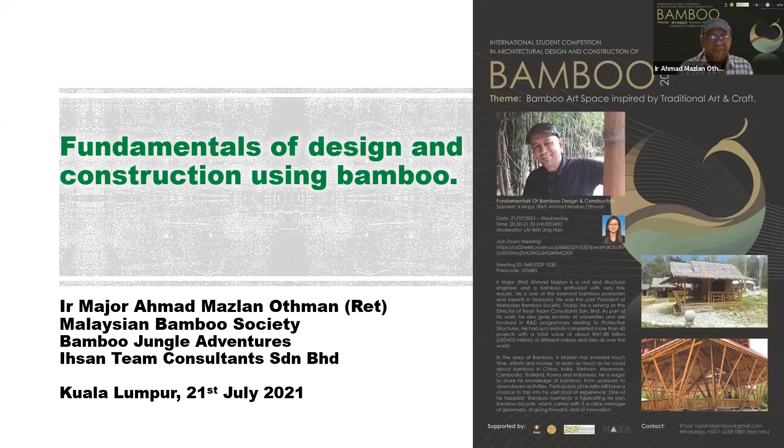I'll talk a bit about the design basics of bamboo building or structure. The scope of my talk is a little introduction to bamboo - what, why, and how. I don't have diagrams of the anatomy, but I will explain it a bit later.

And some fundamentals about designing using bamboo - selection of species, and durability, which is a very important element in doing bamboo construction. Also some basic design requirements and bamboo working basics. I will use the jobs that I've done in Malaysia to review the things I'm talking about this evening, and then we'll open for Q&A after that.

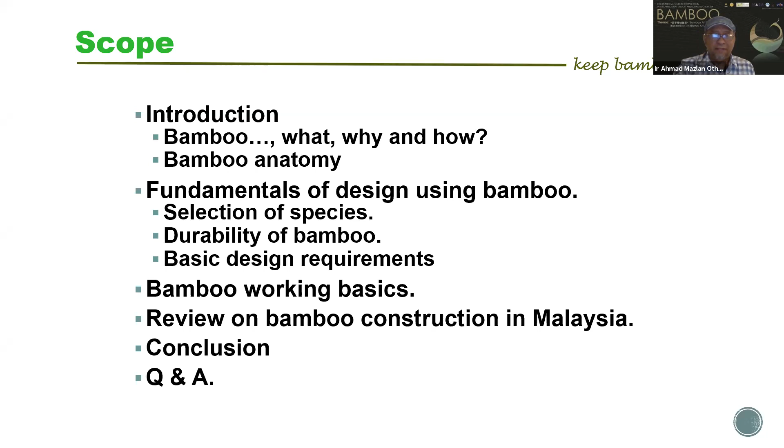Bamboo is a gift of God. It's a miracle plant, a giant grass - it's not a tree, it's grass. And it's a planet savior, we used to say that, because it gives more oxygen and also sequesters carbon dioxide. And it's a plant with 1001 uses, very useful. Bamboo is stronger than steel, and bamboo is the fastest growing plant on earth.

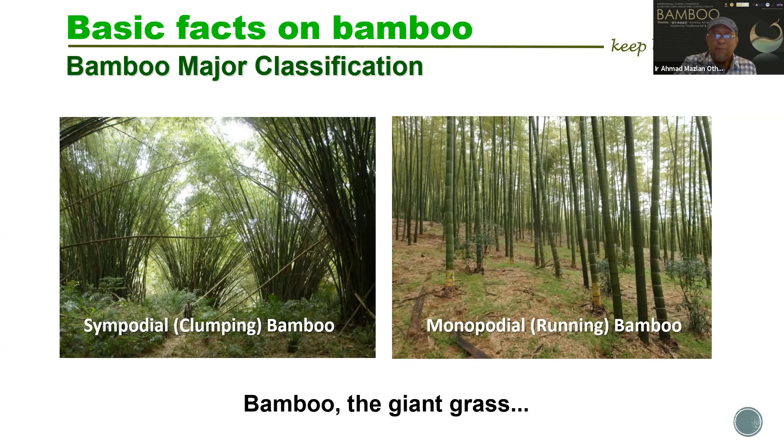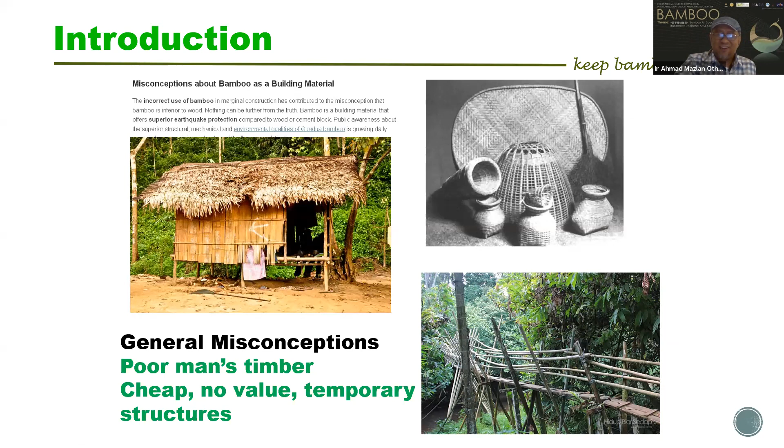Around the world we have got more than 1,500 species. More now, people are discovering more new species, hybrids and all that, so now basically probably about 1,600 or 1,700 species of bamboo worldwide. And unlike softwood, bamboo can be harvested - mature bamboo is between 3 to 5 years, or 3 to 7 years for some species. So bamboo is a hardy crop, a very strong crop. You just, for example, take the branch and poke it into proper soil, then it will grow. So it's very easy to grow bamboo.

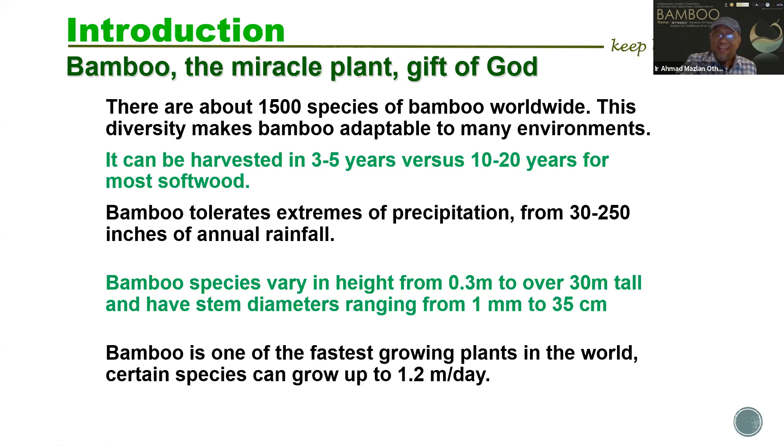We have small bamboo that's only 0.3 meters in height, and others over 30 meters, ranging from 1mm to 35cm in diameter. The species that was standing just now, Dendrocalamus giganteus, can go up to like 35 centimeters. Bamboo is one of the fastest growing plants in the world - there's a record saying bamboo can grow 1.2 meters a day. If you sit in front of a growing bamboo, you can see it grow 1.2 meters a day, you can see it growing basically. So it's the fastest growing plant in the world.

I would like to also mention about this miracle plant - there is a Chinese saying, I don't know how to say it in Chinese, but the English translation is: a man is born in a bamboo cradle and goes away in a bamboo coffin. Everything is possible with bamboo. Meaning that from your birth until you are dead, leaving this world, anything is possible to do with bamboo. And there is a common saying that don't ask what you can do with bamboo, but ask what you cannot do with bamboo - that means anything is possible with bamboo.

Like Miss Beh was mentioning, my passion is making my own bicycle. So the bicycle, we do a bamboo frame for a bike.

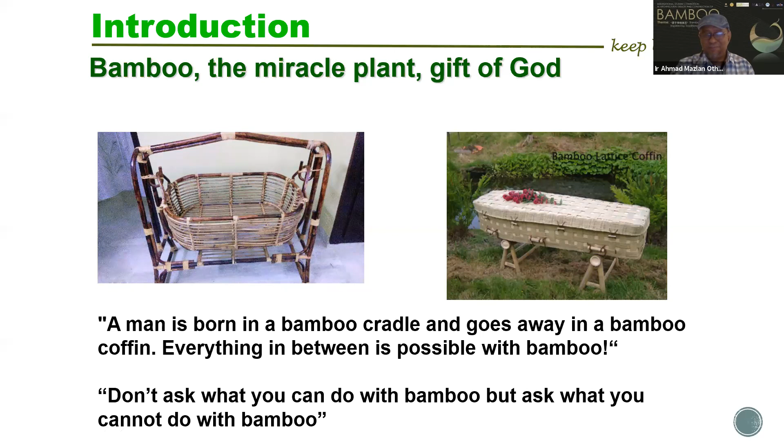People say that bamboo is stronger than steel. Yeah, it's true, but by weight - more strength to weight ratio. I mean, by the same weight, bamboo is stronger than steel.

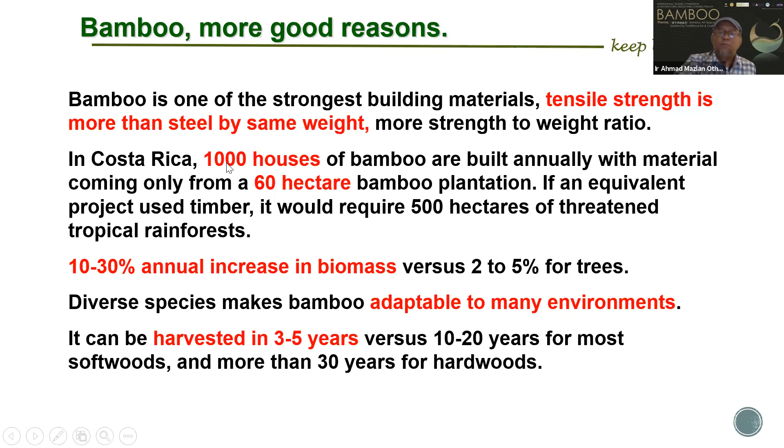In Costa Rica, 1,000 houses of bamboo are built every year from only a 60-hectare bamboo plantation. That means from 60 hectares of bamboo plantation, they are building 1,000 houses a year.

How can bamboo's true potential as a building material be realized? Like I mentioned earlier, the main problem with bamboo is durability. In order to build a building, you need it to last very long. As engineers, normally we design our building with a design life of 50 years. So can bamboo last that long? That's the issue - durability.

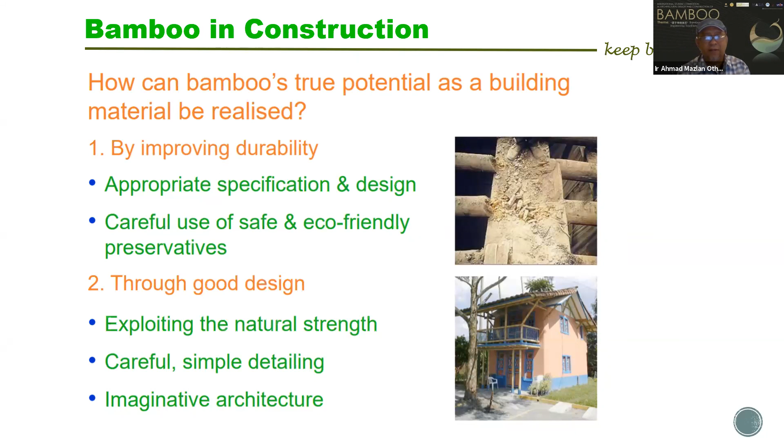You need to improve durability by having appropriate specification and design, and by doing treatment to the bamboo. Number two is good design - it's very important. That means you exploit the natural strength of bamboo, you have good detailing, and good imaginative architecture. You can combine bamboo with other materials - steel, concrete, or wood. So you can exploit the natural strength of bamboo through good design.

Okay, so the basics of designing bamboo. When you want to design and construct bamboo structures or buildings, these are the basics you need to fulfill. You must select the right bamboo species. Although we say there are about 1,600 species in the world, not all species can be used for construction. Some species are good as food - the bamboo shoot as food. Some species are for other uses like landscaping or for making bamboo fabric. So you have to choose the right bamboo species for construction.

Then again, to improve durability - if you don't treat the bamboo building or structure, and just harvest the bamboo and build your structure, it can only last probably 1 or 2 years at most. It will rot because it's organic material. It will be attacked by fungus, and by insects like the powder post beetle. So you need to treat the bamboo in order to enhance its usable life, the durability.

Then again, you need a big hat and big boots for protection against rain and shine. This is the foremost thing you have to look into in bamboo design - the big hat and big boots for protection against rain and shine. That means protection against ultraviolet rays and also protection against dampness and water. Because bamboo is a hollow material with a circular shape, the stability, rigidity, and fixity of the joints is very important. So to overcome that, triangulation for stability is very, very important when you do a bamboo structure. So number one, you must use the right species, and you must do bamboo treatment and preservation so it can last long for the intended life.

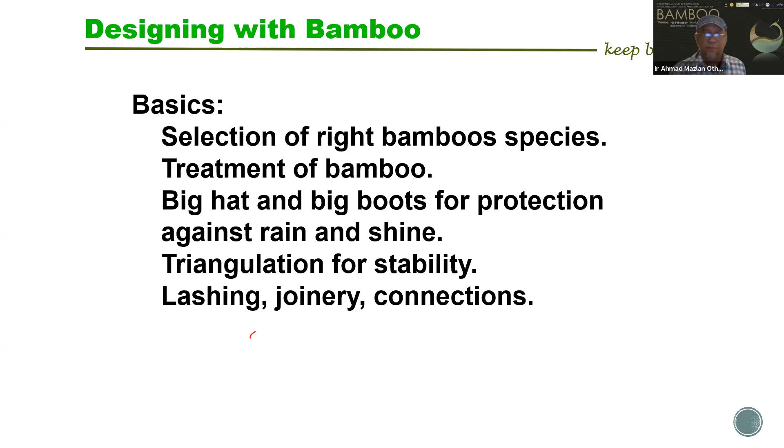Also, you need to understand the bamboo. Another feature of bamboo is it dances in earthquakes, because it's flexible, easy to bend, and lightweight.

That's why in Costa Rica, only bamboo houses stood after a massive earthquake in 1992, because the bamboo dances in the earthquake. Also, the maturity of bamboo for construction is between 3 to 7 years.

But like I mentioned earlier, it's a very useful plant. Even the shoot, you can eat it, if it's less than 30 days old. And if the pole is 6 to 9 months, you can turn it into a basket.

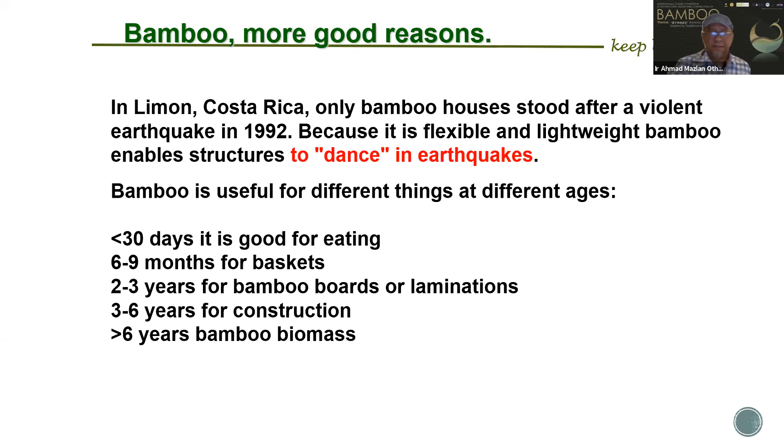For making bamboo board lamination, the age is 2 to 3 years. For construction and furniture, 3 to 6 or 7 years. After 7 years, you can turn it into charcoal or biomass, still useful. That means bamboo is useful at any age.

Selection of a matured pole is very important, because that's where the bamboo already has the optimum strength. This is very important in doing bamboo construction.

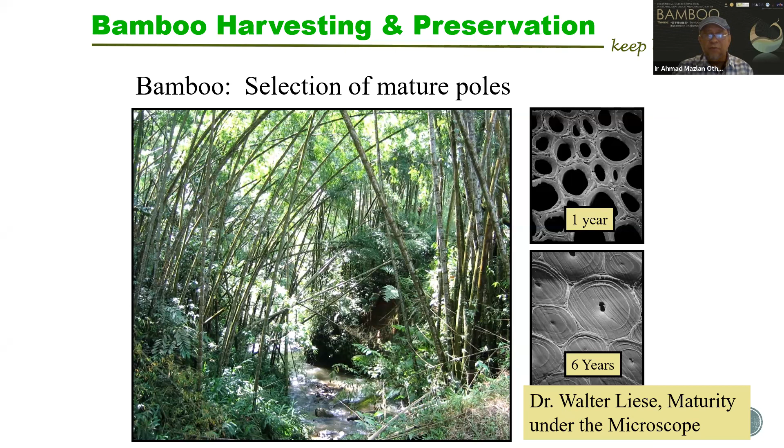Okay, this is earlier one. And how do you select matured bamboo? You can see from the texture, the skin of the bamboo - we have young bamboo, matured bamboo, and old bamboo.

The texture or skin, the lichens, and the white spots - more white spots, more lichens, is the sign of matured bamboo. When we go for bamboo exploration and harvesting, we observe this and mark it according to the age, so that we harvest the correct age bamboo.

Sometimes we select by knocking the bamboo, because different age bamboo has a different kind of sound - the tone is different. A denser tone for older bamboo, a very hollow tone for young bamboo. That's how we select the bamboo.

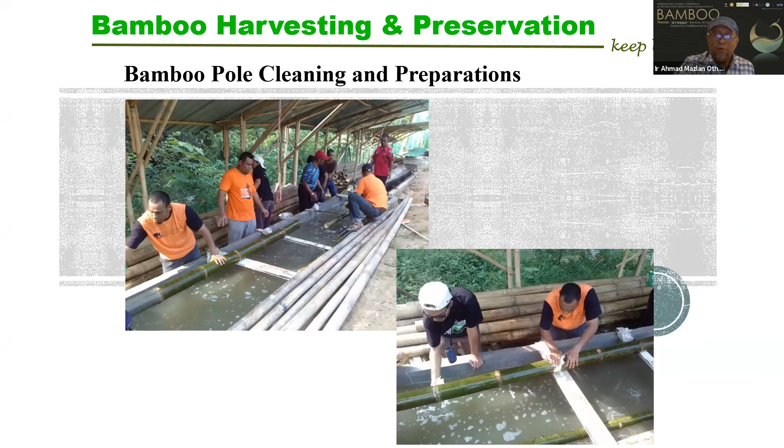After selecting, we harvest the bamboo - we cut it. There are some techniques we have to follow, the proper ways of harvesting bamboo. Then we clean the bamboo. And the importance of bamboo preservation...

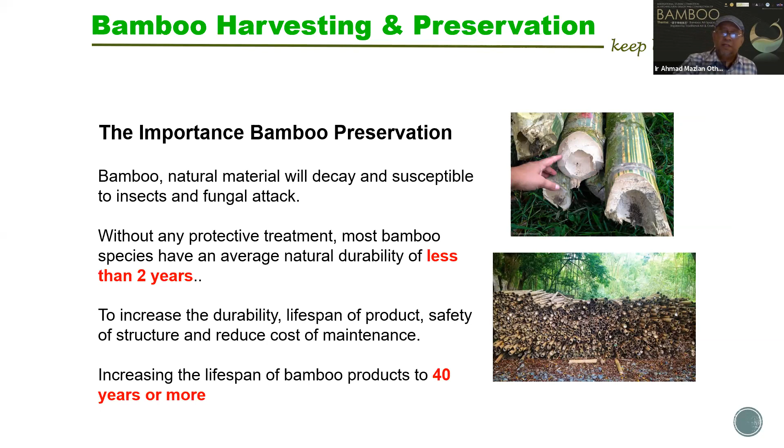If you don't treat or preserve the bamboo, it can only last less than 2 years. But with proper treatment, it can last more than 40 years. Properly designed, properly treated, with the right species and the right age of bamboo, you can easily have more than 40 years lifespan for the structure or building you build.

This is bamboo preservation - either using chemical or non-chemical means. We have different methods. Do you want to know more? This is going to be a different lecture.

Either using the modified Boucherie method, the dip diffusion method, internodal injection, or hot or cold treatment. The modified Boucherie method and dip diffusion are quite common. Dip diffusion means you soak the bamboo in the proper preservative chemical for 2 weeks.

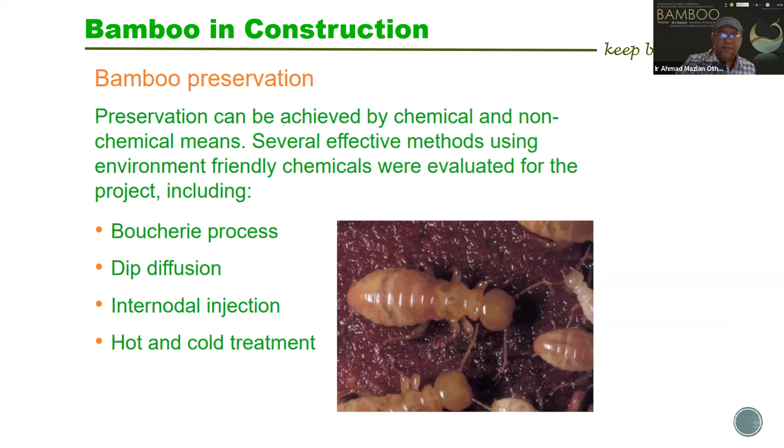And the Boucherie, you pressure inject into the bamboo cell. So these are different methods. This is the Boucherie, and the common preservation chemical that we use is boron in this country.

Hot dipping is boiling that. And basically I'm using this chemical, borax and boric acid. We combine borax and boric acid in the right proportion, then it becomes boron.

This kind of treatment using boron is just for internal use, because it's a non-fixed preservative. Non-fixed preservative means if you use boron to treat your bamboo and expose it to the weather outside without shelter, the preservative will leach out. That's why we call it non-fixed. So for whatever structural element or building component that is sheltered, you can use boron.

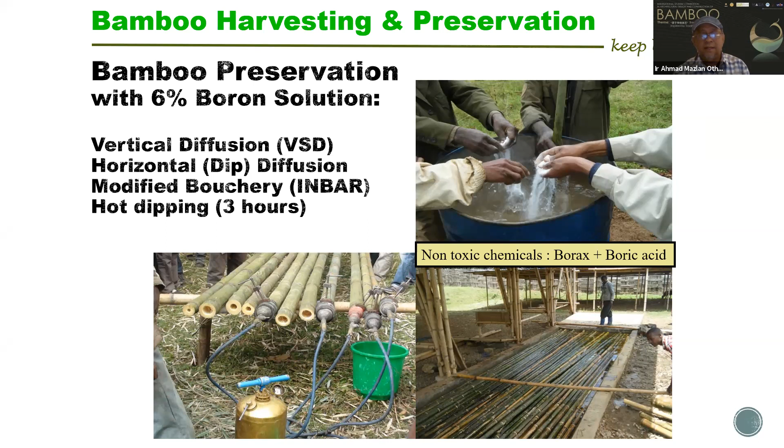But if you want a structure exposed to weather, rain and shine, especially rain, then you cannot use boron. You have to use copper chrome boron, CCB, which is a more expensive chemical. Earlier they used copper chrome arsenic, but now it seems banned in the market because of the toxic level. So now for external use we use CCB, copper chrome boron, and for inside or sheltered components we can use boron.

So that is the preservative. This is boron, which is non-toxic. In fact, most of these kinds of chemicals are used as food preservatives, using borax to preserve food.

Basic bamboo working. In fact, the miracle of bamboo is that it's the only material you can DIY from the very beginning. That means you can plant the bamboo yourself in your yard, harvest it, treat it, and do whatever after that for construction, furniture making, or handicraft — completely by yourself if you wanted to.

Unlike other materials like cement, you cannot produce your own cement. Steel, you cannot produce your own steel. Even timber — you cannot go into the jungle and cut a big timber log yourself, it's not possible. But bamboo is a miracle plant; you can do it all by yourself.

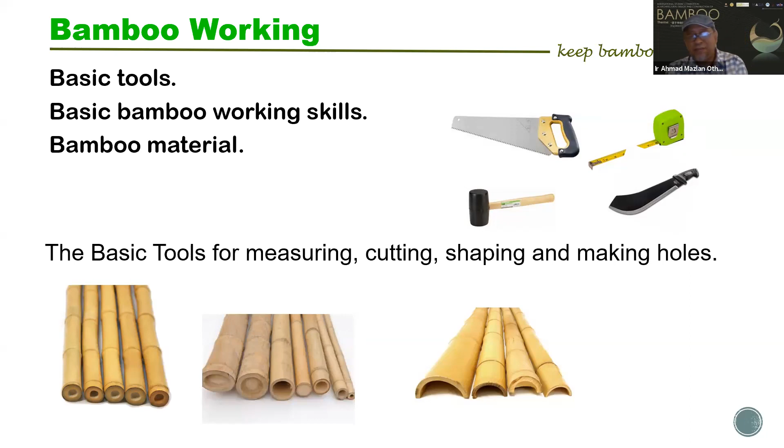For your own needs you just need simple basic tools like a saw, a knife, measuring tape, a hammer. That's all the basic tools, and you can do many things with that. Even houses you can build with these simple tools. So that is bamboo working.

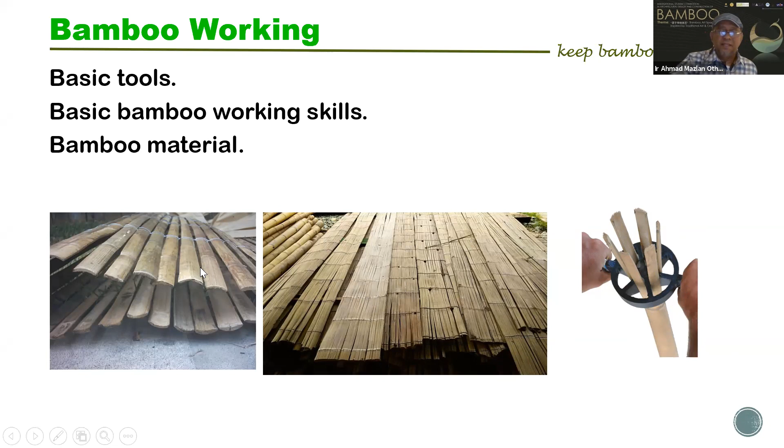Earlier was bamboo poles, half. In Malaysia now there's a very strong effort by the government to promote bamboo, to turn bamboo into a game changer for the commodity. The government is giving strong effort to promote bamboo, and the industry is growing in Malaysia.

We also have people selling bamboo shoots, making furniture, and people are beginning to do bamboo plantations now. In fact, the government, through the agency Malaysian Timber Industry Board, is giving out soft loans for individuals or corporations to establish bamboo plantations.

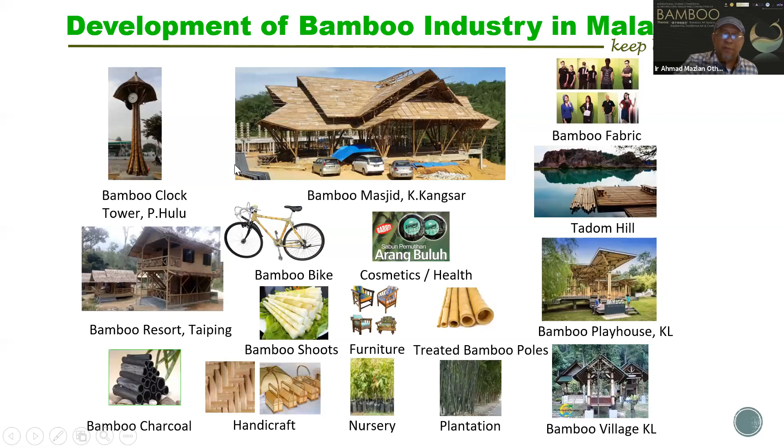We are also having many bamboo nurseries now in the country, and we are making handicraft and bamboo charcoal here. So this growing industry is growing in Malaysia now, and I foresee that construction is still can be the main or the prime industry in bamboo in Malaysia.

Why bamboo for construction? Bamboo is the closest alternative to timber. The way of working with bamboo is almost the same as timber. Only timber is solid, bamboo is hollow, but it's the closest alternative to timber, sustainable and renewable, fast growing, harvest in 3 years, and without replanting. And like I mentioned earlier, it has a high strength to weight ratio.

Bamboo is stronger than steel. It's true, proven by lab tensile test. We did a tensile test between bamboo and steel, and bamboo proved to be stronger than steel.

It's easy to work with using basic tools, light and easy to bend. And also, like I mentioned earlier, it can absorb force and vibration, dancing in the earthquake. It's easy to maintain or repair - whatever damaged parts, you can just replace. And it can last very long, with proper treatment, more than 40 years.

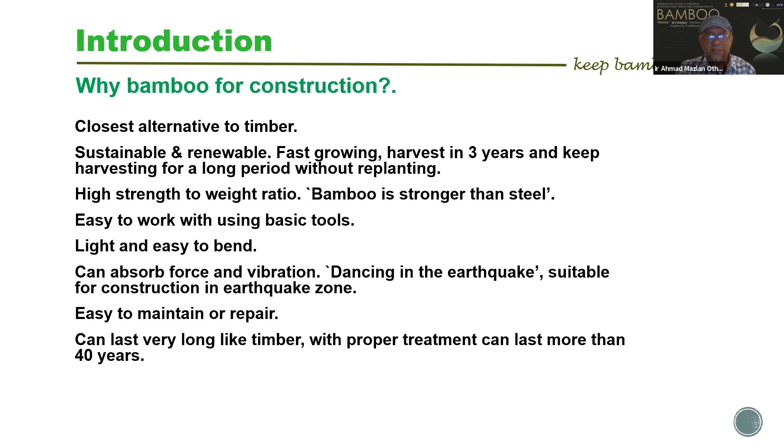A little bit on bamboo in Malaysia: we have got 70 species in our country. We don't have much plantation, but we have a very big area, 5 million hectares of bamboo natural stand in Semenanjung alone, bamboo clumps, bamboo jungle, natural stand. And we don't have a major bamboo industry yet in the country.

But one thing is that we are blessed, Malaysia having a good climate and soil that is suitable for bamboo cultivation, and many foreign good species are growing well here in our country. So there is strong effort by the government now to promote bamboo plantation and the growth of related industry. Welcome all to join to plant bamboo and also to do some related industry with bamboo. The government is giving a lot of incentive and subsidy on bamboo plantation and bamboo industry. You can check with Malaysian Timber Industry Board for that.

Another thing I want to let you know, selection of species is very important for construction. Like I mentioned earlier, not all species are suitable for construction. But we are lucky here - this is the top 20 best bamboo species in the world.

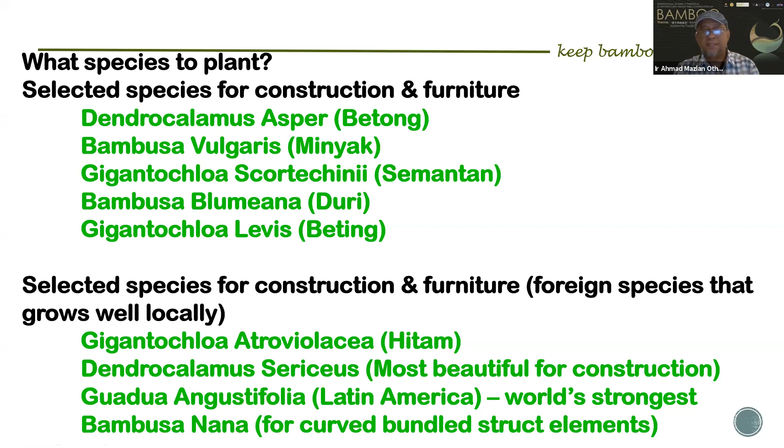That is bulu hitam or Gigantochloa atroviolacea, Dendrocalamus sericeus, Guadua, just now I mentioned, the world's strongest bamboo, also growing well here, and Bambusa nana also growing well. So basically, we have good soil and weather to cultivate these good foreign species for construction. So these are the species that if you want to plant for construction or for furniture, these are the good species that you should be planting.

An important thing about bamboo in construction is that before you design your bamboo structure, you need to source where you're going to get the bamboo. When I started doing bamboo construction in 2013, I imported treated bamboo poles from Indonesia. But those were the days.

After 2 or 3 years, I switched to harvesting bamboo from the jungle here in Malaysia and doing the preservation and construction ourselves. Source of bamboo is important because you must have enough supply, and the cost of bringing bamboo to your place should not be expensive. When I imported from Indonesia, the freight and transportation cost was more than the cost of the bamboo itself.

So the source of bamboo is important to consider, whether the species you want is available. You also need to design to suit the strength - the real strength of bamboo is tensile strength. And you have to take into account the weakness of bamboo, because it's hollow with fiber running in just one direction, so it's easy to crack.

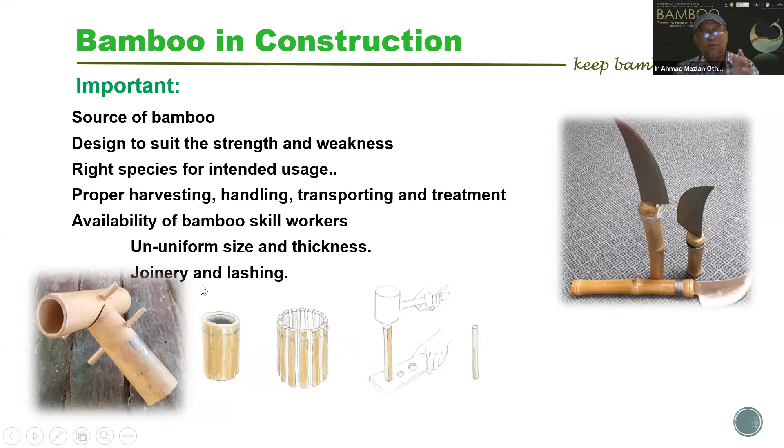Many local bamboo species are suitable for construction, whether structural or non-structural. My practice is that for structural use, I take bamboo with thickness more than 6mm. The thickness of bamboo varies from bottom to top, because it tapers towards the end, and the thickness also gets thinner towards the end. So for structural purposes we need more than 6mm thickness.

These are the species I normally use in my projects: Betong, Minyak, Duri, Semantan, Beting, Matarusa, and Brang - these are the species for structural use. For non-structural use, it can be any species - meaning for wall, floor, roof, cladding, mats, etc.

We even use woven mats - we use Buluh Lemang, taking the skin and weaving it into a mat. So Buluh Lemang can also be used as construction material for wall and floor. So for non-structural use, species doesn't really matter, but for structural use you need to consider specific requirements.

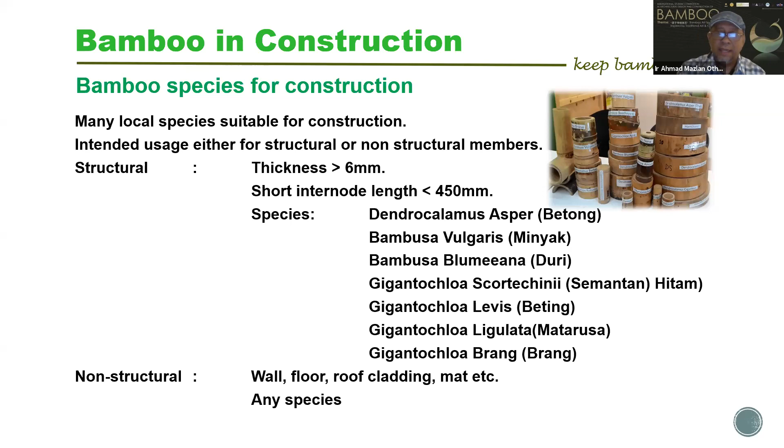You need a short internode length between the nodes, and it should not be more than 450mm - that's the general guide. The shorter the internode length, the stronger the bamboo; the longer the internode length, the weaker it is. That's why the world's strongest bamboo, Guadua angustifolia, has a very short internode length, less than 300mm, and is very thick. That's why it's the world's strongest bamboo.

Ways to use bamboo - later I will show you photos. Now for the literature part: you can use bamboo as a structure element, column, beam, joists, frame, trusses, and stairs, as well as building components like wall, floor, door, window, and for temporary structures like scaffolding.

I was made to understand this aspect with Dr. Low, who is specialized in using bamboo to strengthen soft ground.

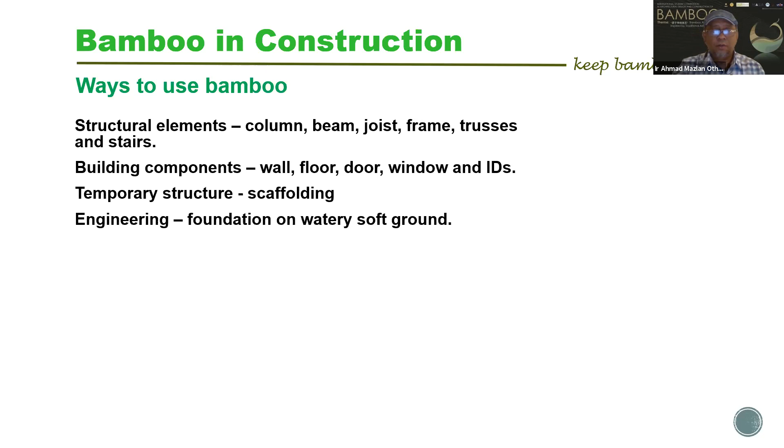When we design with bamboo, it's very important to avoid common mistakes. Two common mistakes I've noticed are exposure to ultraviolet light - which means you need a longer overhang - and exposure to rain and dampness, either from the ground or from rain directly.

So bamboo buildings end up rotting and giving a very bad impression, leading to the misconception about bamboo. We need to have a big hat and big boots to protect against rain and shine, and we need to understand the material and use it to its fullest capability. Normally we say there's nothing wrong with bamboo itself - only our construction techniques and design are not good.

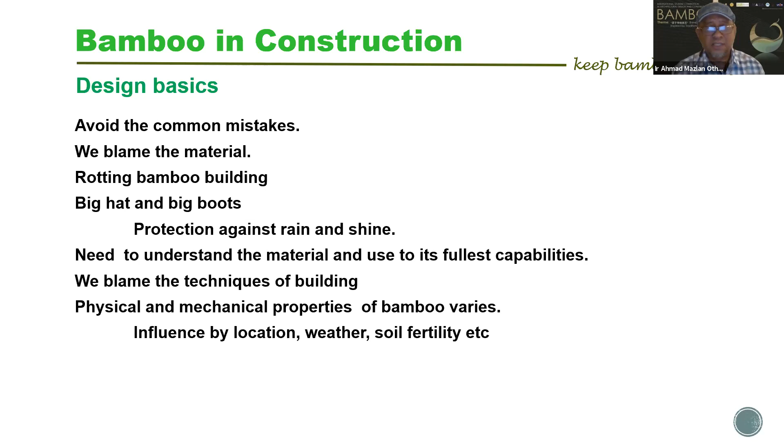I mentioned earlier that the physical and mechanical properties of bamboo vary, influenced by location, weather, soil fertility, etc. Now for design basics.

This is very important. If you want to build a bamboo structure that can last very long, you need to have a big hat and big boots. A big hat means protection against rain and shine, while big boots means protection against water and dampness from the ground.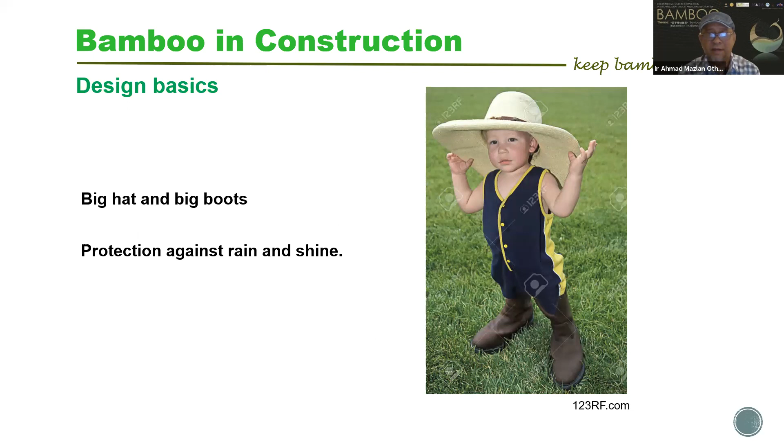For example, this is the overhang for a bamboo structure - you need a longer overhang compared to normal buildings. Normally we have about 2.5 feet or 750mm as the standard overhang, but for bamboo you need to extend it more so that when it rains, the rainwater doesn't touch the bamboo. That's why you need a big hat here.

You also don't want water from the ground to seep up, which will rot your bamboo - that's why you need big boots. Typical bamboo construction has a stump like this, minimum 10 inches or 25 centimeters. The starting point of the bamboo should be more than 250mm above the ground or floor, to protect against splash and seepage of water from below, from the concrete and so on.

That's why I say big hat and big boots. Sometimes in Indonesia they like to use natural stone blocks as the big boots to protect the structure. Later, Widi Nugroho will show more on using these stone blocks to protect bamboo from dampness below.

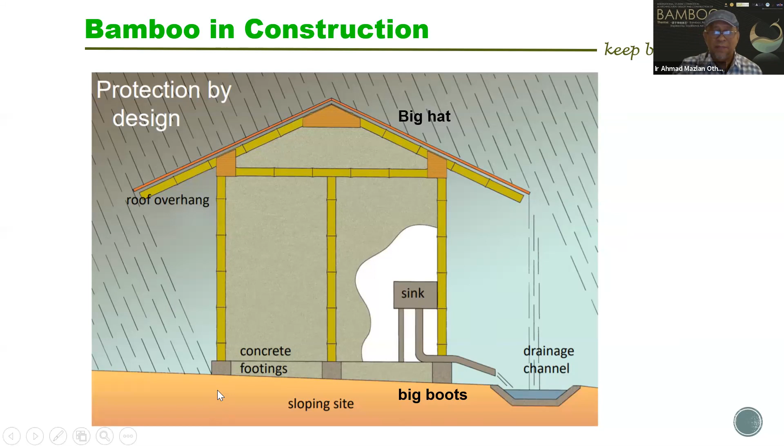Now, ways to use bamboo, either naturally or engineered. We have round bamboo poles - you can use big size bamboo for columns, or small size bundled bamboo for columns and beams. You can also have bamboo halves, bamboo splits, and flattened bamboo for walls and floors, which can also be laminated in 3 layers to make a strong beam.

This is engineered bamboo, laminated bamboo, processed bamboo, either as planks or lumber.

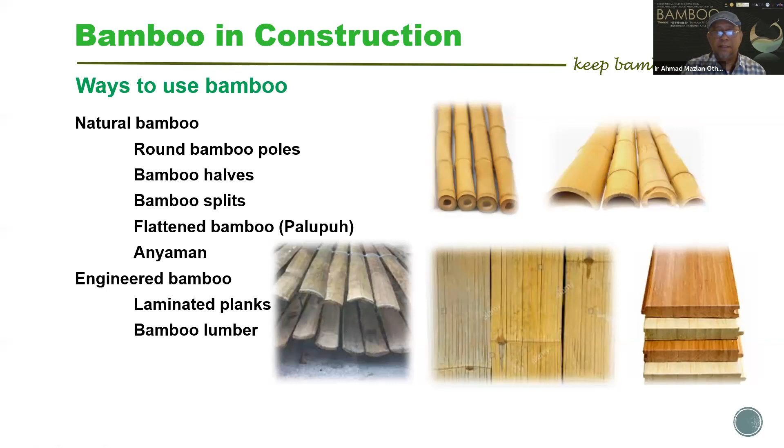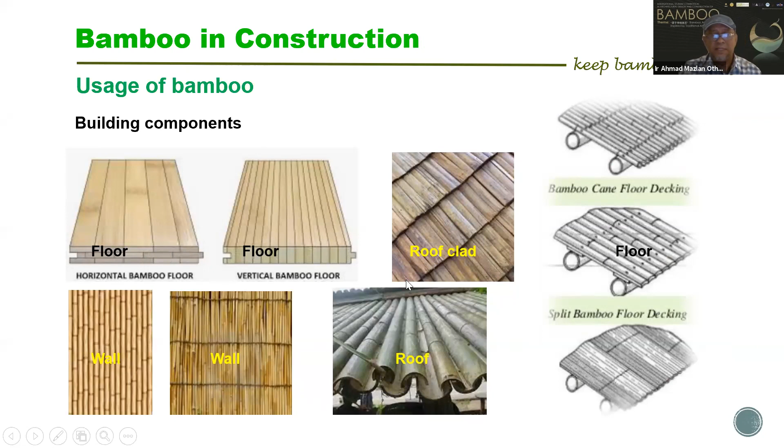And also flooring - that's how bamboo is used as a building component. These are engineered bamboo products, including very high density outdoor engineered bamboo, and this is bamboo lumber, bamboo plank.

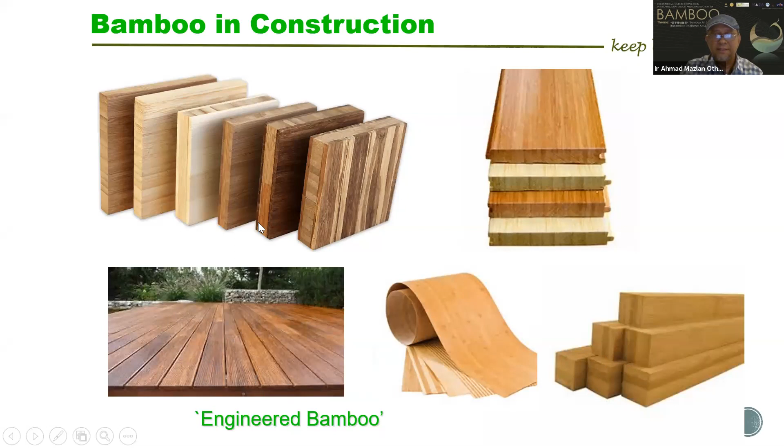Okay, this I want to see here. People used to ask me, some people are interested in having bamboo, starting with a small bamboo shed like a gazebo, and going up to bigger buildings and all that. So they approach us and ask us to quote for the bamboo building that they wanted to build. But eventually they shy away because they thought that bamboo is cheap.

So my own personal experience is that it's not really cheap. Although you can get the bamboo free, there's the cost of treatment and the cost of labor. I can say that just a simple bamboo building might cost you like 100 ringgit per square foot or so for a proper bamboo house. So it's about the same as using a cement house, a brick house, about 100 ringgit per square foot like that.

And now even timber is more expensive. We built a house with a footprint of 6 meters by 5 meters at our place in Taiping Resort. So 300 poles is sufficient for a 2-story, 6 meter by 5 meter bamboo house.

Unlike normal construction, bamboo construction labor is higher. The cost of labor is sometimes 60 to 65%. And the cost of material is lower, but the labor cost is high because, as I said earlier, skilled workers are difficult to get.

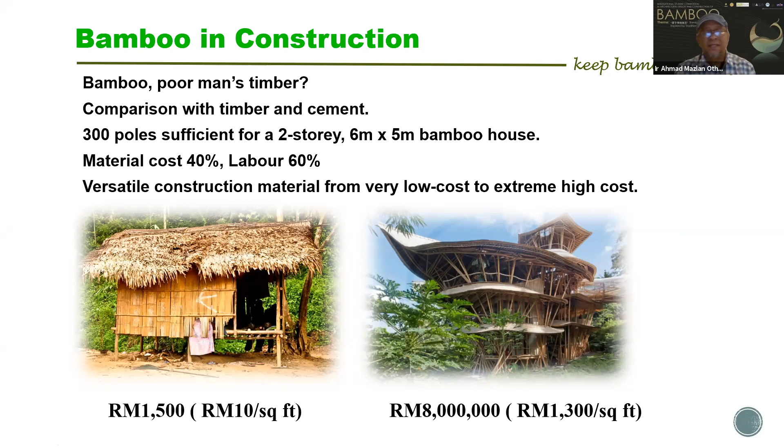Okay, just a little bit on the current status in Malaysia, because I don't think other speakers are talking about this. The general public perception is still that bamboo is cheap and cannot last long. We don't have a standard in planting, harvesting, processing, or sales of bamboo poles. We have insufficient supply of raw poles, we don't have plantations, and harvesting from natural stands is expensive, high cost, and we don't have many designers.

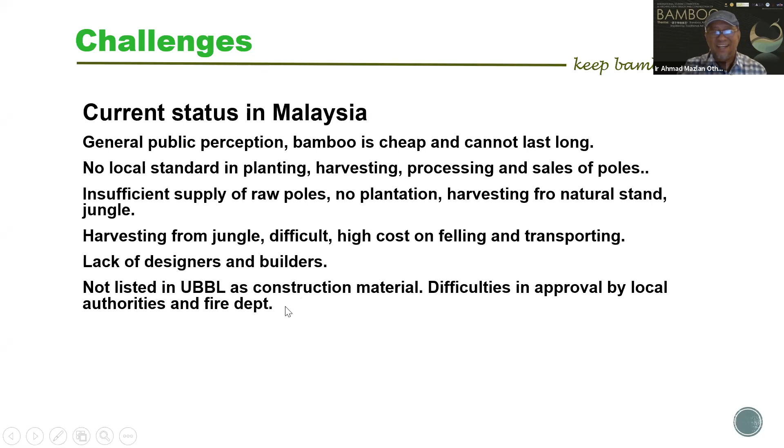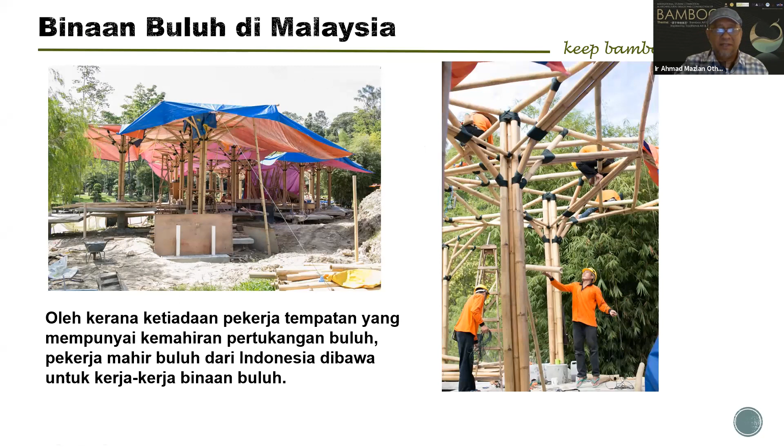We hope that future architects and engineers will give us more designers and builders. We also have problems with authorities for submission because bamboo is not listed as a construction material in the UBBL. So we're still facing that. In fact, I'm still going many times to the fire department to justify and get approval. Sorry that this text is in Malay, but this is from last time - maybe Dr. Elina already covered this one, the bamboo playhouse. We are still depending on foreign labor for skilled bamboo workers.

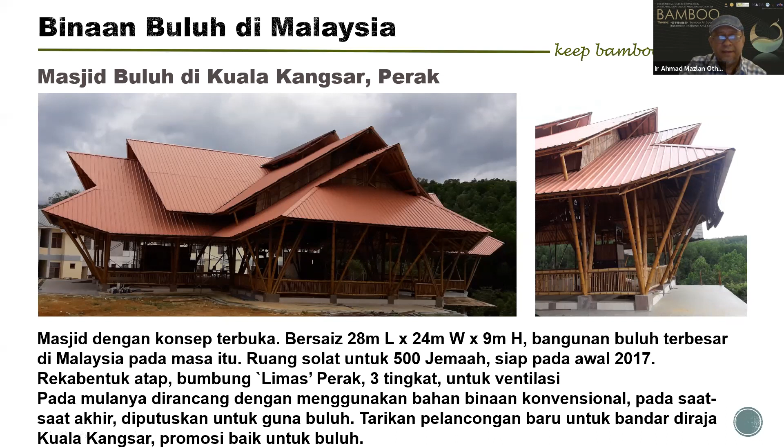This is a collaboration between me and WNA Studio in Bali, completed in 2017. While working with bamboo, models are very important.

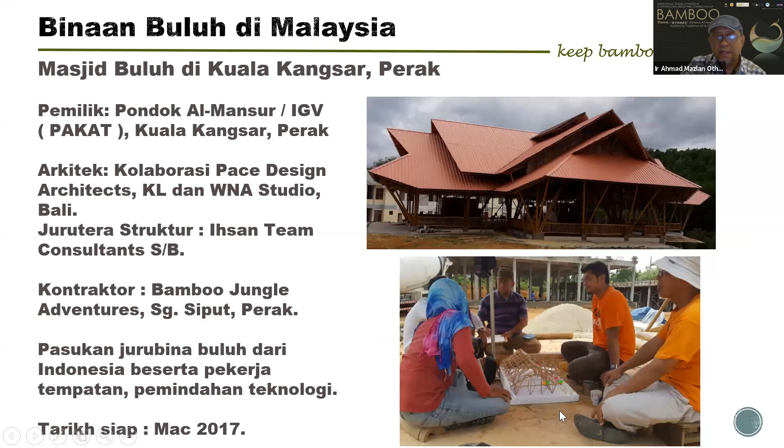Before you build out your physical structure, you need a physical model. This model is very important for the construction. Even though the size is scaled, the bamboo stick here is also scaled according to the size. The moment we build the model, we can press it and check which area needs attention.

So for all my other jobs, I do a model first, and from the model, I improve. We take this model to site, and the builders will follow every stick here. Let's say the scale is 1 in 100, so they measure the stick and multiply by 100. It's easy for them. Every element on the structure will be reflected on the model.

And this is the frame. From this model, we fabricate the frame, and our joints are pin jointed. Because of pin jointed joinery, which isn't very rigid, we have to have triangulation, a lot of triangles to stabilize the structure. So we use threaded rod and nut as connectors, modern metal connectors.

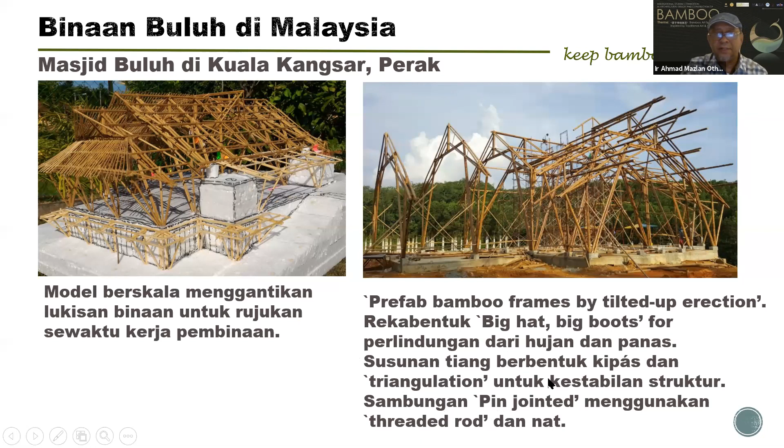While doing this job last time, I imported the bamboo, but now I'm using local bamboo because shipping costs are very high now. A 40-footer container from Jogja or Bali can easily cost more than 20,000 ringgit, just the freight cost. So now I'm using locally available bamboo and we treat it ourselves. For the structure in Kuala Kangsar, we used 80% imported bamboo and 20% local bamboo.

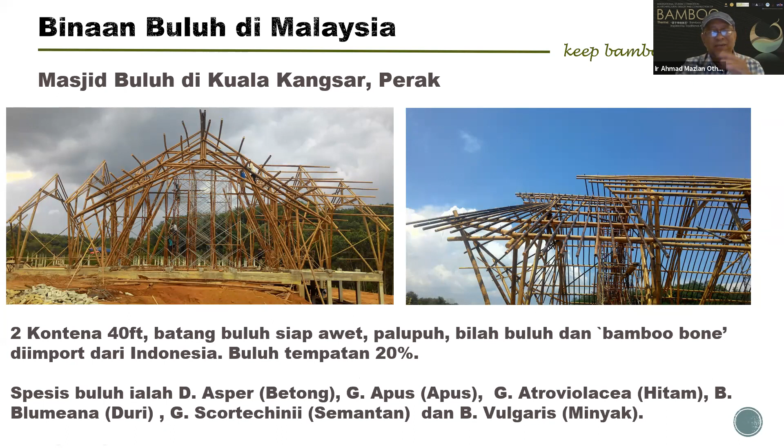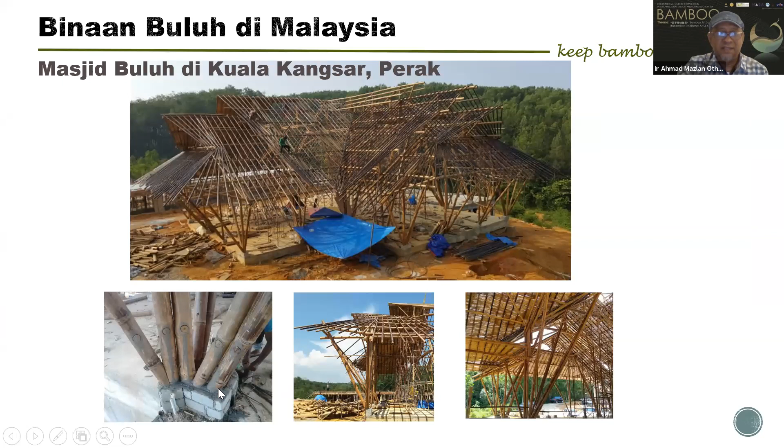These are the bamboo species that we use. Normally for a bamboo structure, we expose the structure from below so you can see all the structural elements. We don't cover it with a ceiling, because that's the beauty of bamboo structure. This is the structure during construction, and you can see it's raised above the ground.

Another, more experimental project: we built maybe the only clock tower in the world, in Pengkalan Hulu. It's more of an experimental job because it defies all the basic rules I mentioned earlier, that we have to have big hats. Here the hat is not so big.

It's exposed to rain and shine, so the number one issue is that this bamboo cannot be treated using boron. If you treat it with boron, the preservative will leach out, and the bamboo will be attacked by termites, by the powder-post beetle, and by fungus. So if you want a structure exposed to rain and shine, you should use CCB, copper chrome boron, which is a fixed preservative that will not leach out.

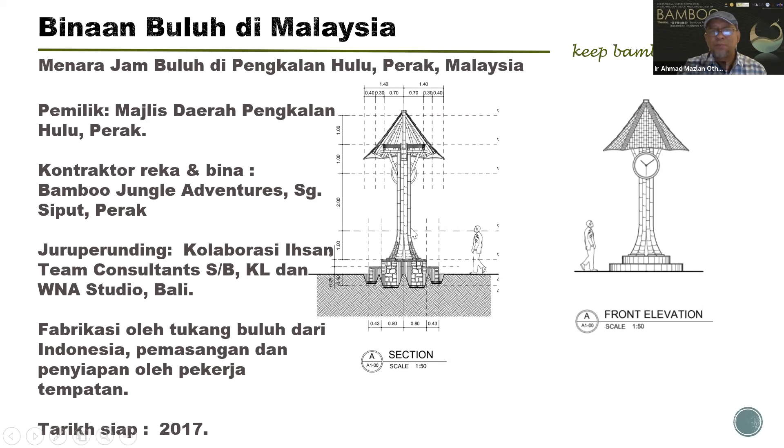That is the danger. Number two is that maintenance is high. Once you expose bamboo to this kind of condition, maintenance is high because there's no real protection against rain and shine. The bamboo will crack from ultraviolet exposure, and if you don't treat it with CCB instead of boron, the chemicals will leach out and the bamboo will be attacked by fungus. So how do you overcome this problem?

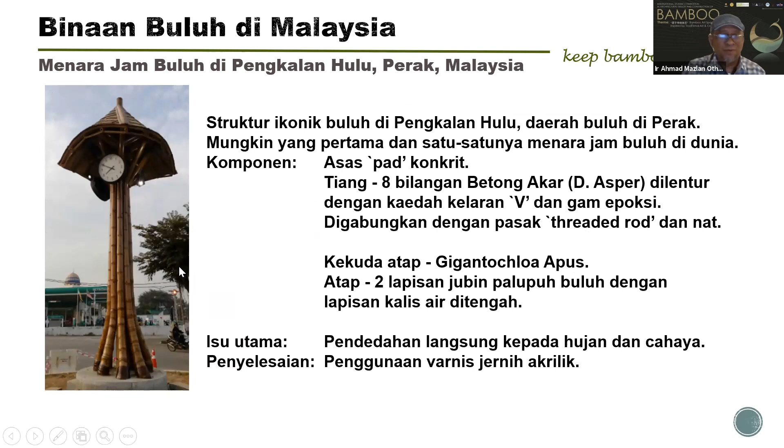Number one, maintenance has to be high, because you need a special PU kind of varnish to protect against UV. But even with that, you have to repaint the varnish every year to protect the bamboo. This is the technique we use to bend the betong.

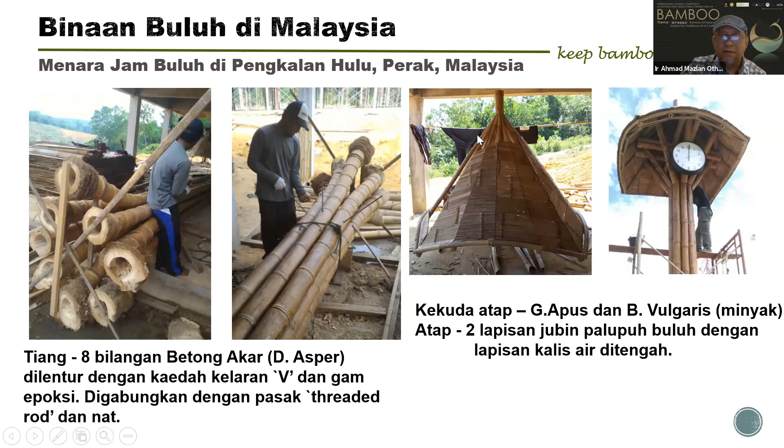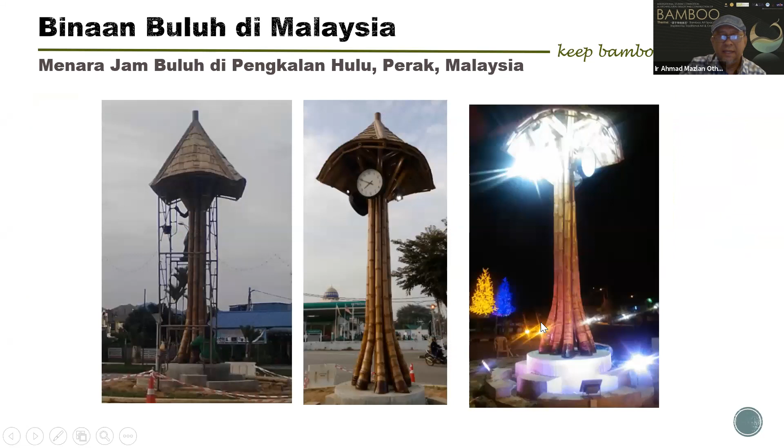You can see it's very attractive here, as we take not only the bamboo pole but also the rhizome, the roots of the bamboo, as the beginning. We bend it using the V-notch technique with bamboo pins and threaded rods. This shows the roof and the construction, and how we make the concrete footing to protect against dampness, and this is how it looks when completed.

And these are more construction examples, I don't have much time. We don't have spectacular structures like they have in Bali or Thailand, Chiang Mai, but we have something, we have to start doing something. So these are the bamboo structures: Masjid Buluh, Gua Musang, Rumah Buluh in Sungai Siput resort, and Tadom Hill.

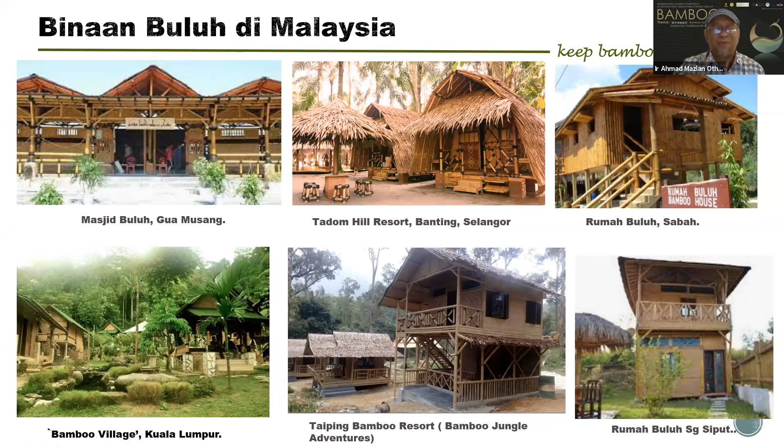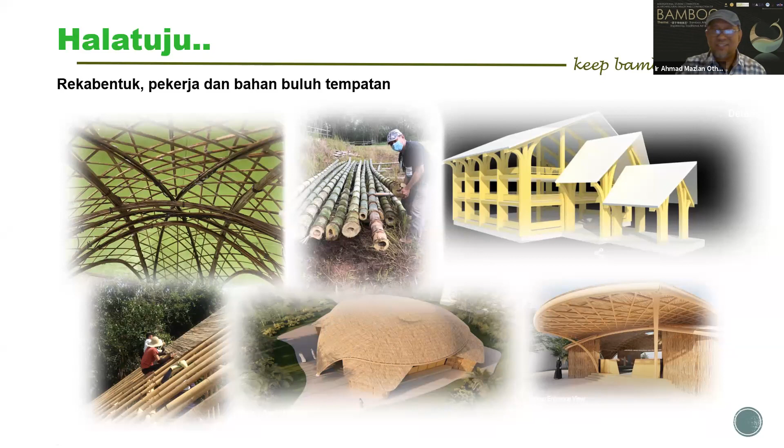Right now I'm doing some construction under progress. This one is in Terengganu. And also this I'm doing at Dusun Eco Resort, Bentong. We also completed some work in the prestigious resort in Datai, Langkawi, two years back.

So to conclude my talk here, there are more slides but I don't think I have the time now. I have some standby slides but we don't really have the time. So what I can conclude is that with proper material preparation, proper design, and proper construction method, bamboo buildings can last very long.

I can say that in our country, the construction sector can be the main sector leading the bamboo industry. We hope more players, more young players will come, and with this competition going on, create more interest among young architects or engineers to do more bamboo, to be involved in the bamboo industry. I believe that with a holistic approach among all stakeholders, bamboo can be the new game changer in the country commodity. Bamboo can be a replacement or alternative to timber.

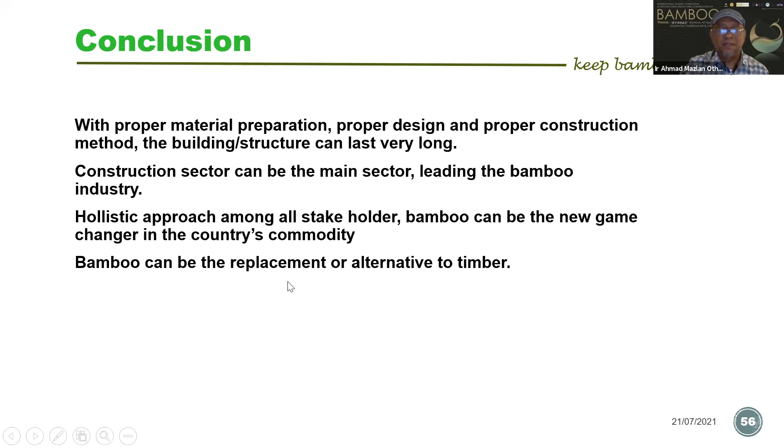Okay, thank you, that's all for this 45-minute talk. I wish that we can still communicate with each other, because I really want to see the bamboo industry growing in our country. So that's all.

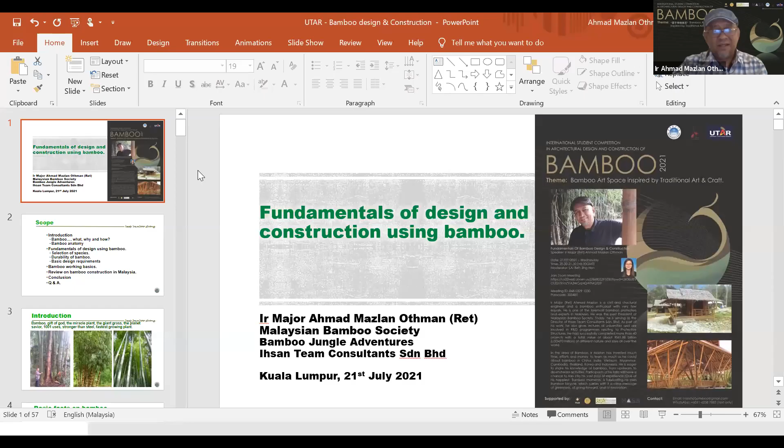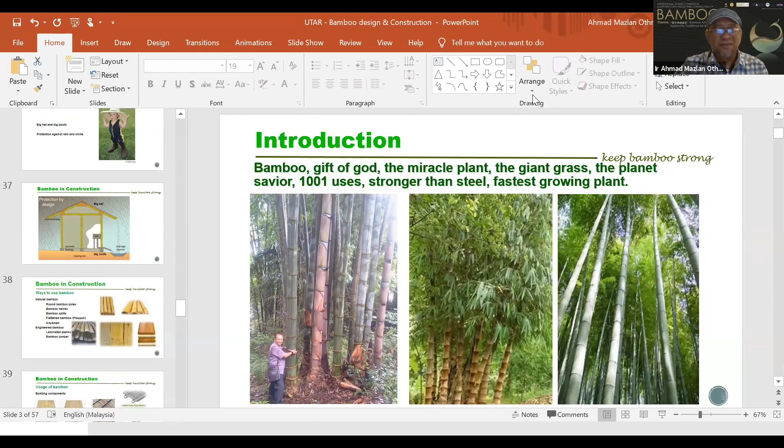Actually there are not many players in the country doing bamboo construction. To be honest, I've rejected many jobs doing bamboo because we don't have enough resources to really take on the projects. That's why I say it would be good if we had more players, then we can share this sort of thing.

The common method of treatment in Malaysia for industry is still the soaking method. Traditionally people used to soak the bamboo for a few weeks in river water or in a pond, but that's for personal use. For industry, for commercial purposes, we need a proper treatment that gives confidence to our clients.

At the moment we are using boron as the chemical. You can buy it from importers and retailers selling in Malaysia, in Kuala Lumpur, and also in Seberang Perai, Penang. Boron is a mixture of borax and boric acid, combined to form boron. You can buy it, and you can contact me - I can give you the contact of the person selling this boron.

The most common method is soaking the bamboo in a pond or a long tank. Let's say your bamboo is the standard 20 feet length, so you need a tank longer than 20 feet. You put your bamboo in and add the solution, which can be 6% or 10% concentration, but most people in practice use 6% concentration of boron mixed with water, and you soak the bamboo for 2 weeks. That's the most common method being used now.

Another feasible method that I'm also using is the horizontal soak, where you bathe the bamboo horizontally in a long tank, or the vertical soak, where you stand the bamboo up, punch nodes except for the last node at the bottom, and fill it up, letting the solution stay inside the bamboo for 2 weeks. That's another method being commercially used here. Another method is the modified Boucherie method.